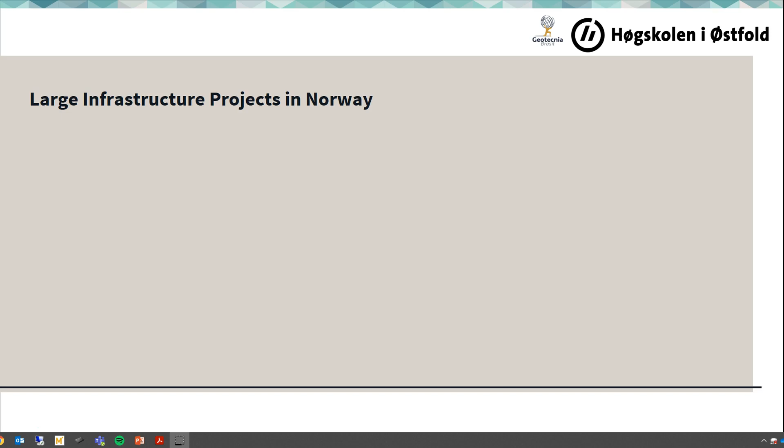Well, just to give a little introduction of what we are talking about. When we think of developed countries like Norway, we think all infrastructures are well done, very big, like those big roads with big bridges crossing fjords or mountains, or big double lines.

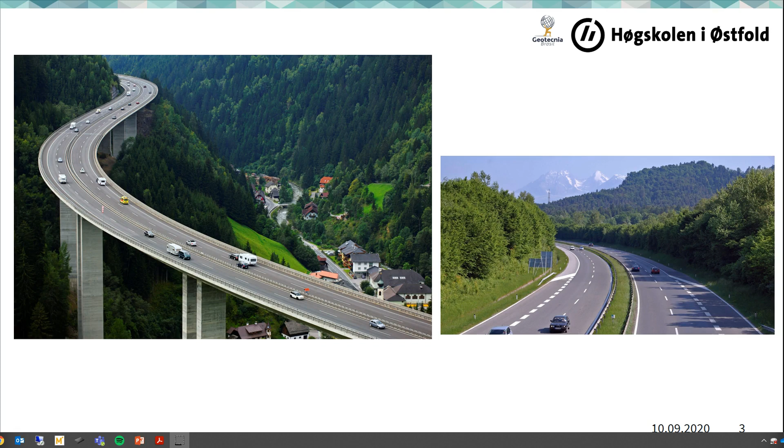Well, unfortunately, this is not the case in Norway, because in fact Norway has more or less roads like this, very narrow, crossing the mountains or crossing lakes, fjords, or even crossing mountains with snow during the winter. So that brings us a lot of problems in the traffic.

In Norway, for instance, a good example is Trollstigen, the famous mountain road in the north of Norway. It is very famous because of its deep, sinuous curves to cross the mountain. The problem is that this road is only open in the summertime. During the winter it is practically closed. So this road is very often opened in mid-May.

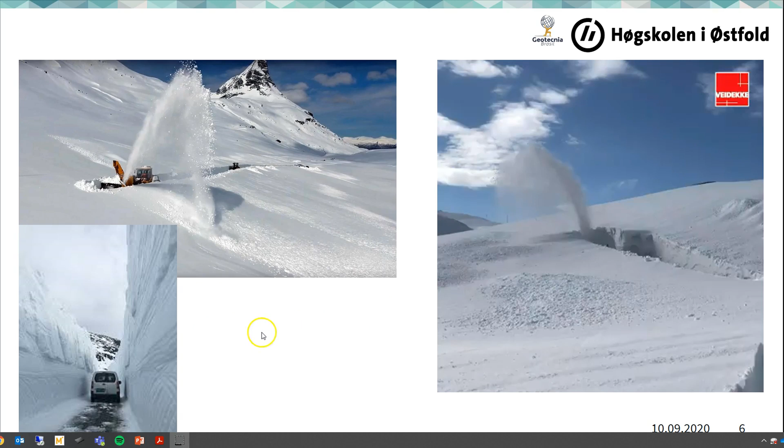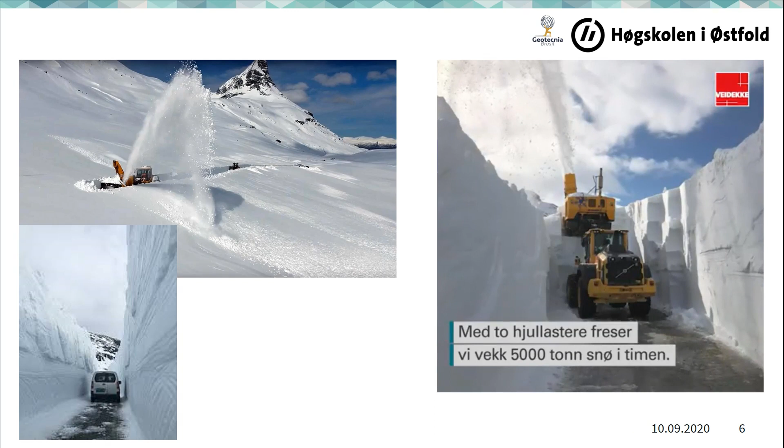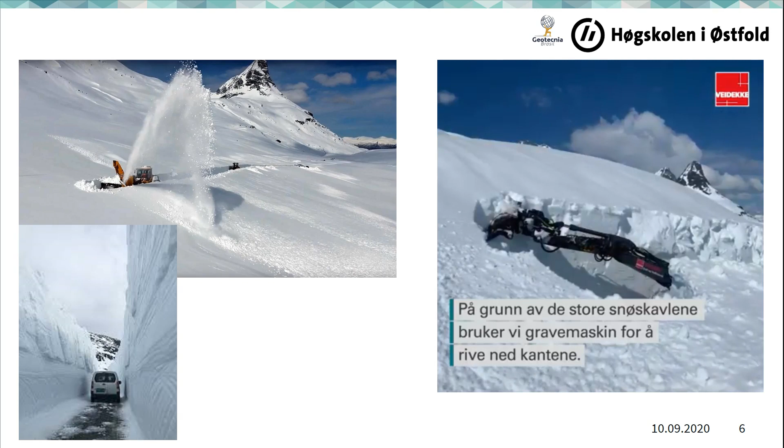So that means from almost October to May it is not possible to cross this road. So if you see here, this is the operation they did this year to open the mountain. There was a lot of snow last winter, and they had to use big machines. They took almost 5,000 tons of snow, and they dug almost 10 meters deep. So you can see that it's a very complicated process.

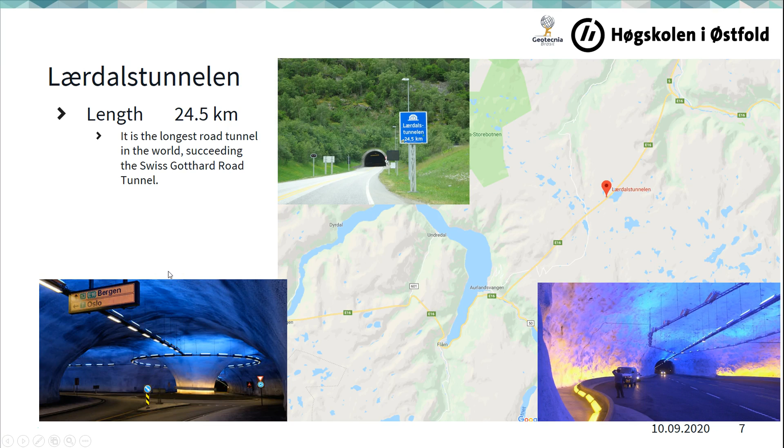We have also the very famous Atlantic Road, also in the region, Atlanterhavsveien. It is very famous because they used the natural islands in the North Sea to build the road. So the trace of the road was defined not by the engineers, but by nature and how they could connect these small islands to build the road. It's a very famous road in Norway, and you can see by the pictures it's a very nice road to cross.

Together with that, recently in southern Norway, close to Oslo, they started developing highways. So in this process, a lot of bridges and tunnels have been made. And the interesting project I want to share is the Farris Bridge, or how we call it in Norway, Farrisbrua. It crosses Farris Lake, just north of Larvik, south Norway. This bridge is part of the expansion of the E18 motorway from an antiquated single carriageway to a big highway.

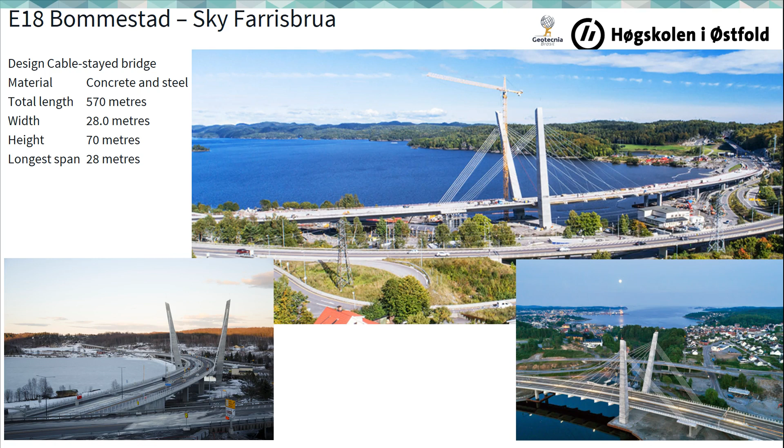So this bridge is a composite bridge because you have concrete sections with steel sections. It is 570 meters long, 70 meters high, and the maximum span is 28 meters. And on this bridge it is interesting to see the foundation process. The bridge's biggest foundation is in the tower, of course. The foundation is made of 12 pillars, steel tubes measuring approximately 2 meters in diameter. You can see it when you compare someone close to these pillars.

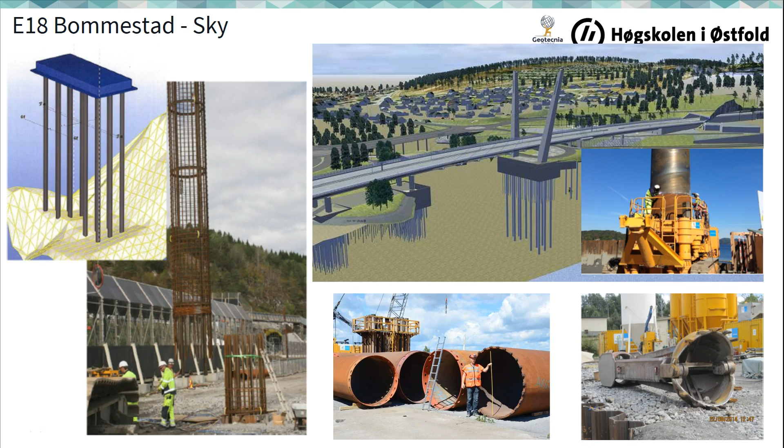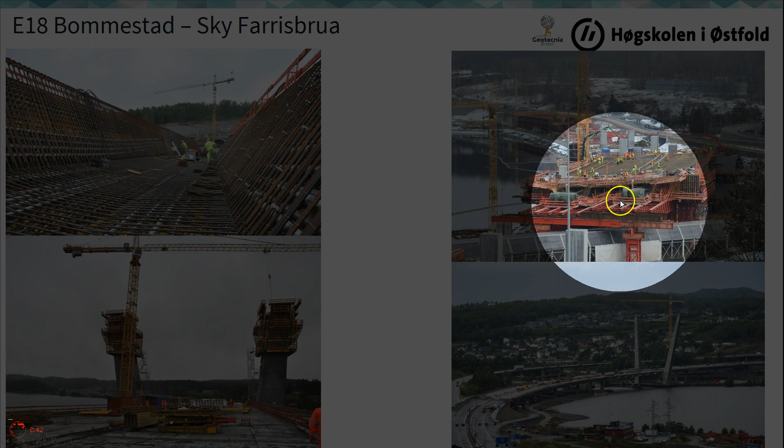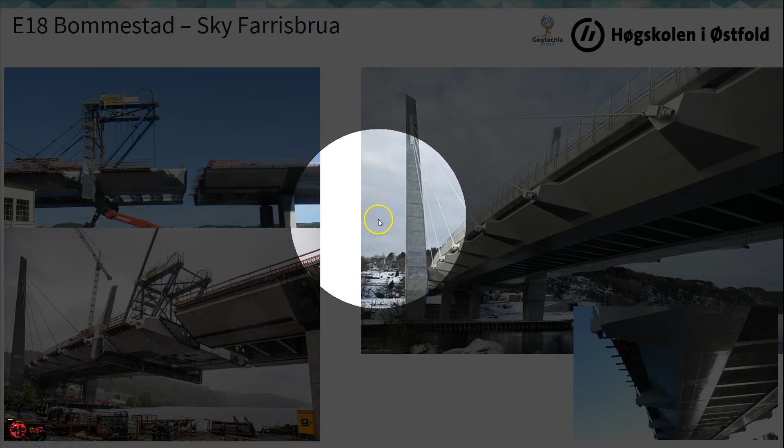As I mentioned, the main span of the bridge was steel sections, so they are assembled in pieces. They come together to connect the steel section of the bridge to the concrete sections. But what's very interesting in this project, in fact, is not the bridge itself, it is how the project was connected. Because the bridge itself is at the end of two tunnel sections, the Martineåsen tunnel and the Gopledal tunnel. So it's two tunnels connected by a bridge. And here you can see the profile of this tunnel and how deep they are made.

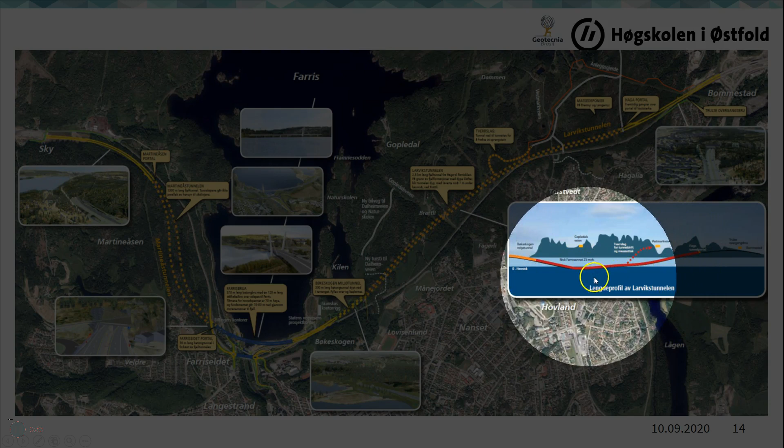Here we can see short videos where you can see the experience, what it is like to drive this tunnel. And I have to admit, it's a very good experience, especially when you go in. I will talk about those mountain rocks here after, because it's kind of interesting to discuss what happened.

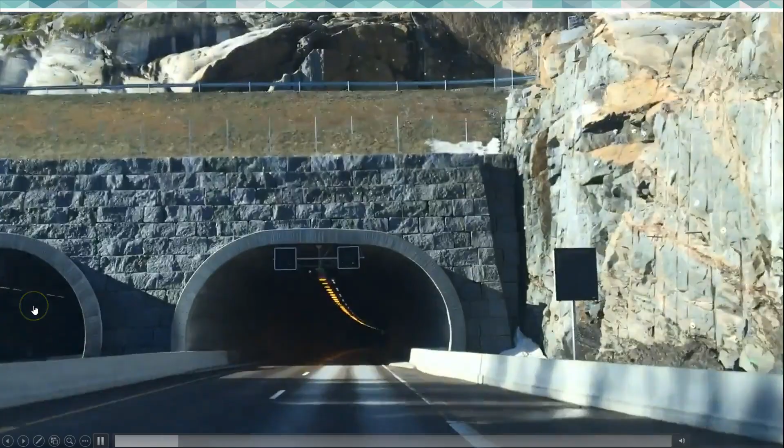So you can see this tunnel, the concrete section. The tunnel is based on concrete sections, plates. They are used to protect the structure, the concrete tunnel structure. So it's placed by sections.

The tunnel excavation was not by blasting, it was by drill excavation. Due to the characteristics of the rock, it was not appropriate to use a blasting process. So they had to drill and open the rocks. Also, the problem was the city was above the tunnel, so it was not appropriate to use a blasting process.

So you can see it is well illuminated. Also, all emergency exits are very well illuminated. It's almost one exit for each 500 meters. So it's a very safe tunnel in case of accidents.

And it's very spectacular when you finish the tunnel, then comes the bridge. It's very nice to see this effect, how you come out from a tunnel and onto a bridge. So it's a nice road trip if you think about it, and very safe.

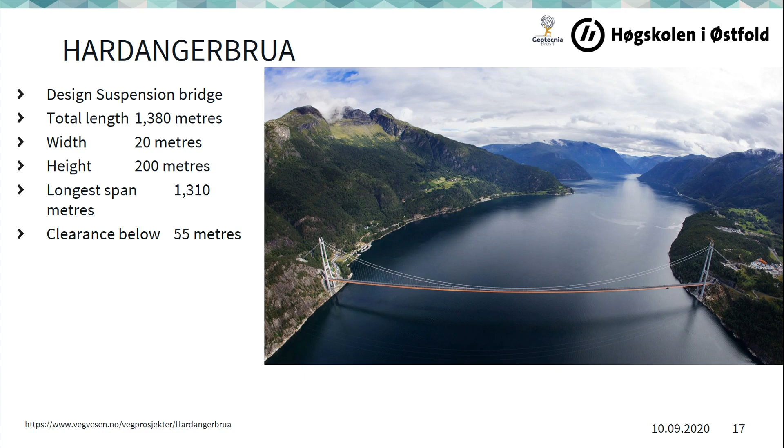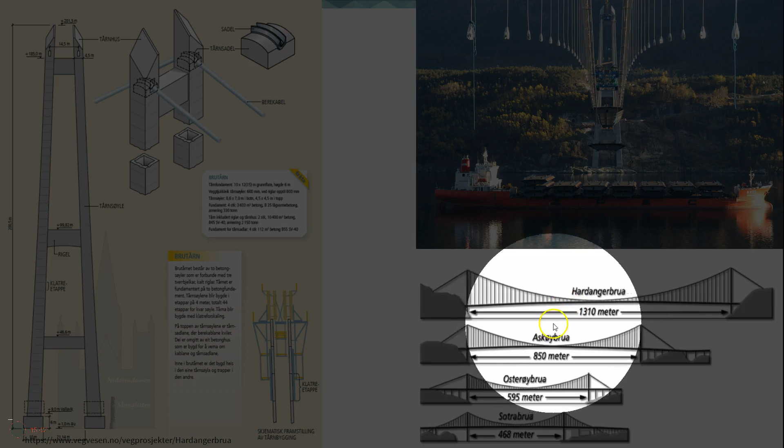This is an overview of the sections that were made. All steel sections of the bridge were transported by boat. They were built in China and sent to Norway. And this is just to have an overview of the dimension of this bridge in comparison with the other bridges in Norway.

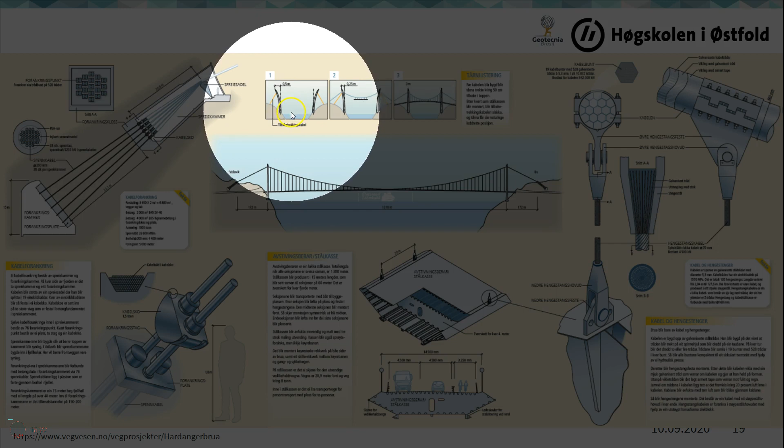And here we can see a little more detail on the section of the steel decks, how they are designed, the couplings, the cable system, and the anchorage system of the cables, and of course how the cables were designed and placed. And here is a short presentation of the construction process. First the towers were begun, then the cables were placed in the towers, and after that the deck sections of the bridge were put in place.

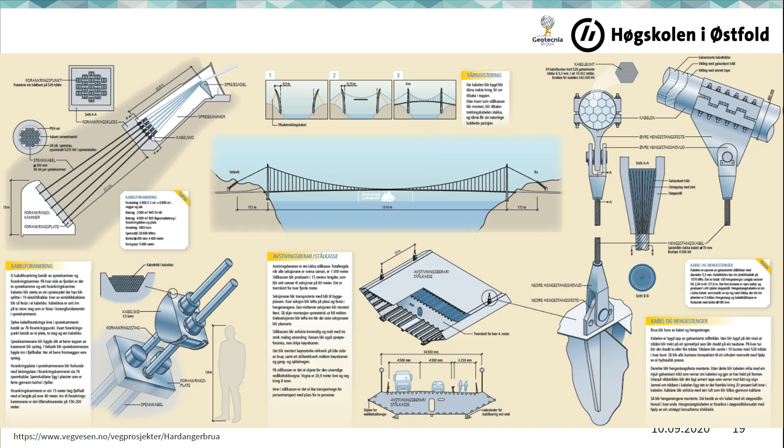But maybe the most interesting project happening now in Norway is the ferry-free E39. It's maybe the biggest infrastructure project in the world at the moment. It's very interesting because it has a lot of engineering challenges. The ferry-free E39, as we call it in Norway, is the main project to improve a stretch of the existing E39 highway between the cities of Kristiansand and Trondheim. It's almost 1,100 kilometers long.

The problem of this road is that today there are a lot of parts where you have to use a ferry to cross the fjords, as shown here in red. There are almost 7 ferry crossings. So the main idea of this project is to replace some of these fjord crossings with alternative routes like tunnels or bridges to reduce travel time along the west coast of Norway.

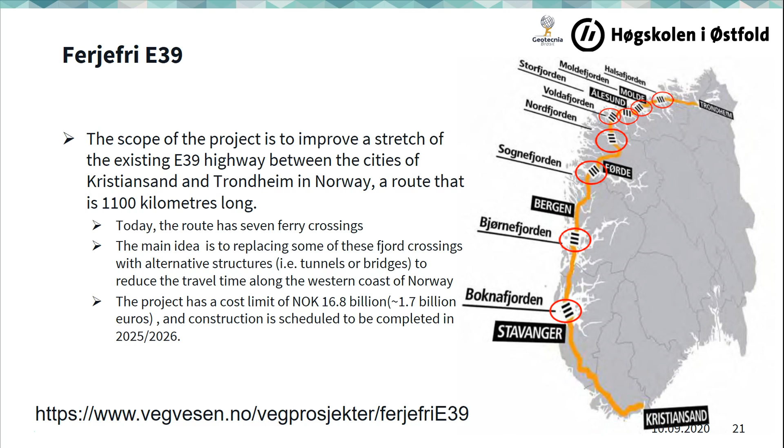The project has a cost limit of 16.8 billion Norwegian crowns, approximately 1.7 billion euros. Construction was planned to complete in 2026, but the latest planning is to complete in 2030, later on 2031. Just to give a perspective of what we are talking about, if we take a drive from Stavanger to Bergen, it is just 210 kilometers.

But due to the ferry crossing time, you can have almost a 5 hour trip. That's very long. The other option is using the mountains, which can be even longer in time. It's not so long in distance, but the time can be very long, 6 hours long.

And we are talking about this in a good summer day. In a typical Norwegian winter time, we talk about almost 3 or 4 hours more. And here are some ferries that you have to cross.

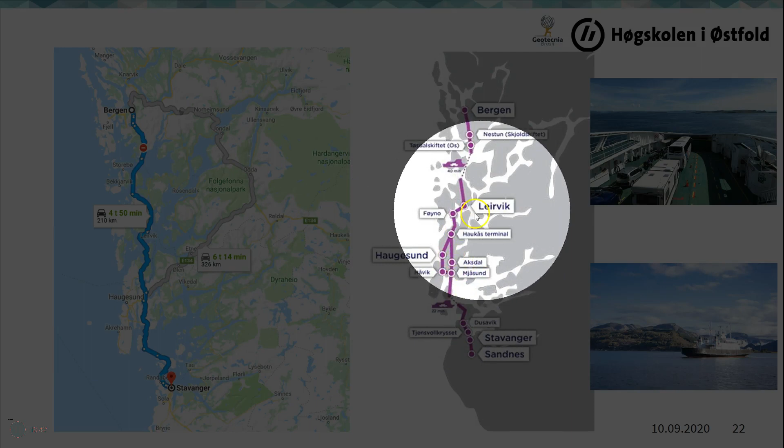Some people can say using the crossing ferries is not a problem because you can have some relaxed time, drink a coffee, also use this time to see the views of the fjord. Of course that is a good option, but not normal. You can have very nice weather, but sometimes you can have problems.

You have some storms crossing the fjords and that can sometimes be very problematic. In recent years there have been a lot of storms in Norway, and during the crossing ferries we had a lot of accidents. This was during a crossing in a storm.

A truck inside the ferry just rolled over and crushed some cars. This is another example: a concrete truck that rolled over inside a fjord, and this was inside the deck of another ferry. Some have had problems during the storms.

So although it's not very often, it can be very problematic sometimes. So we have to consider that the government has to decide what kind of bridge they can use in the process. Here is just a short review of what kind of bridges we can use.

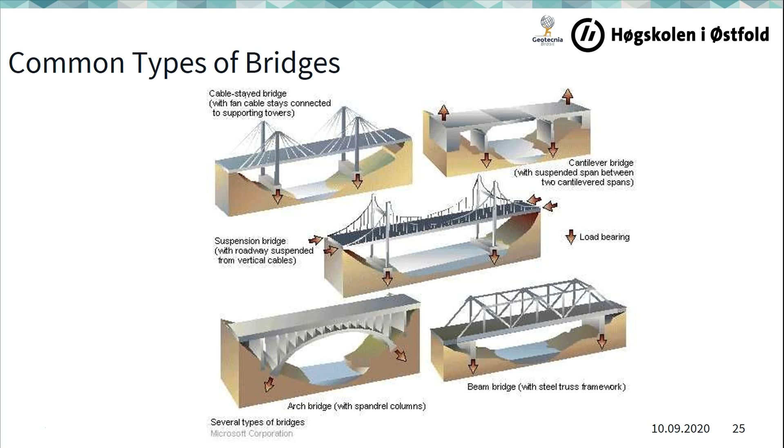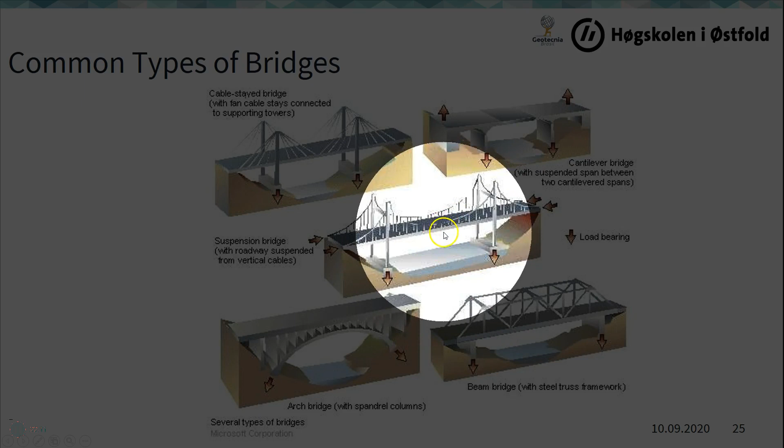The problem was each bridge has its own limitation regarding the span. For example, a cantilever bridge is very limited. The maximum span some can hold is an arch bridge or cable-stayed bridge. The most appropriate to cross fjords sometimes is a suspension bridge because it gives you more span length. Also, you can have more free span between the bridge and the water.

So the government tried to understand the experience from other projects. For example, the Akashi Kaikyo bridge had almost 2,000 meters free span. That still holds the record of the longest free span bridge. There was the project of Messina Bridge, with 3,300 meters free span, that was in conception but was not built yet.

And there is another experience in the region itself with a floating bridge process that's still state of the art, and there is so far no submerged floating tunnel experience, although there is a lot of experience from another type of submerged tunnels.

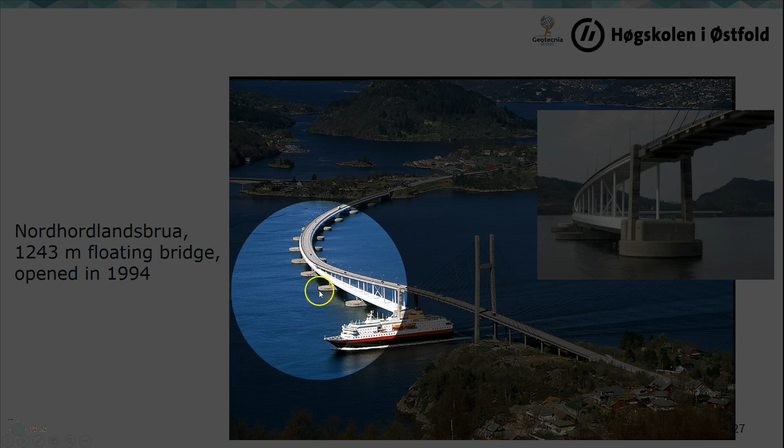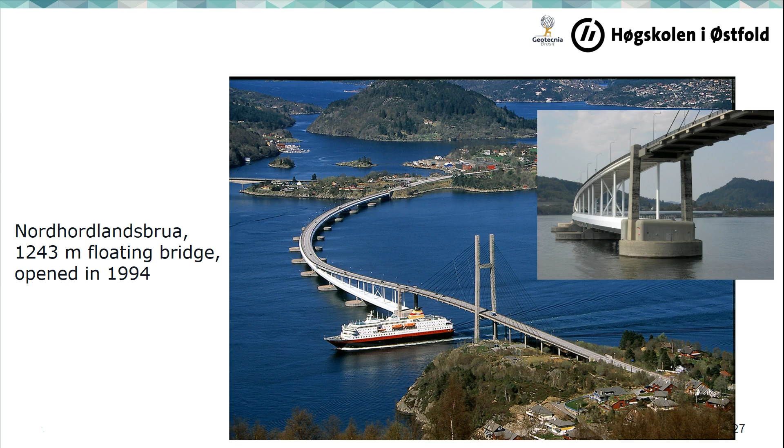From the point of view of Norwegian experience, there is this Nordhordlandsbrua bridge, which was a 1,240 meter floating bridge. So instead of having a normal column deep in the water, you have these pontoon elements, so they are floating and fixed in the bottom of the fjord. This was the main option that the government has considered for crossing the fjords.

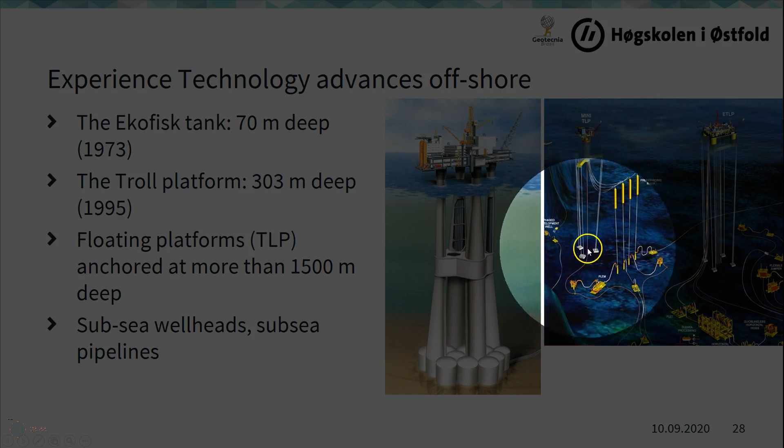Of course, they have the experience technology from offshore industries. For example, Norway has good experience with deep elements from the Troll platform that is 303 meters deep, the biggest concrete element ever made. So they also have experience with floating platforms where the structure is floating but anchored in the seabed by cables, and they have a lot of experience in subsea pipeline systems.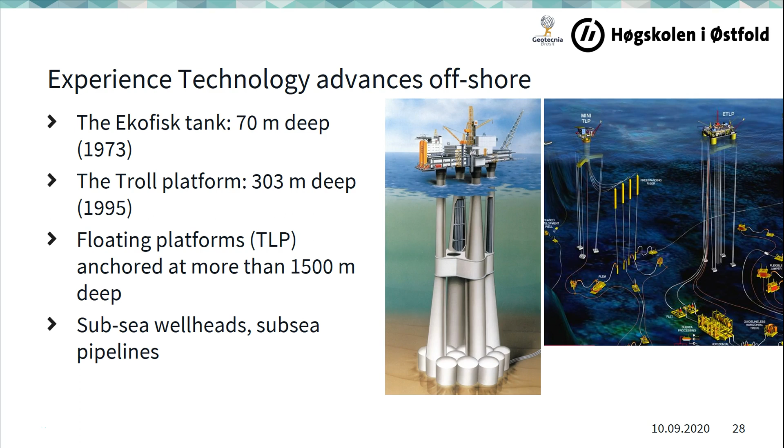So the main idea is to use this experience from offshore in these projects. Just to give a short overview of the options, for example we have some fjords. Halsafjorden is 2,000 meters crossing and 200 meters deep.

It will be a project combining a bridge style with tunnel. We have Moldefjorden, which is 1,600 meters with a bridge combination with 13 kilometers of subsea rock. There is Storfjorden, approximately 3,100 to 3,400 meters crossing and 450 meters deep. And there's Voldafjorden in Norway. So these are the projects currently in development.

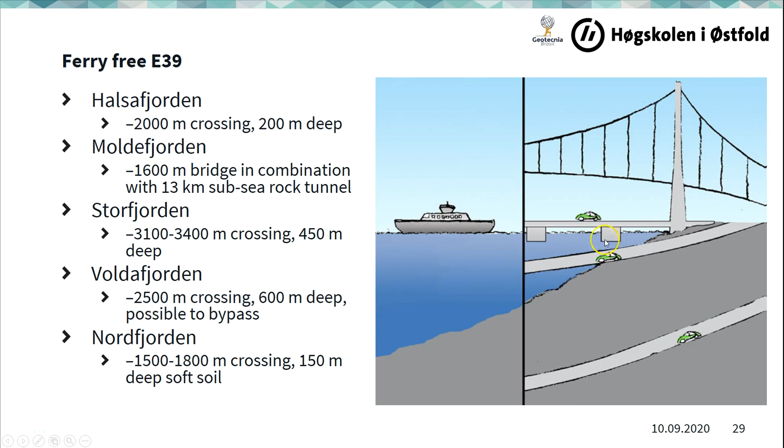So most of them were designed with a combination of the suspension bridge and tunnels or floating system. This is an example, Moldefjord: a combination of tunnel with a suspension bridge. This project is under development and will probably start later this year or at the beginning of next year.

But this is not the most challenging fjord crossing that we have in this project. Maybe the most challenging are these three. The Sognefjorden, that is 3,700 meters crossing, and we have a depth of 1,300 meters. We have Bjørnefjorden, that is almost 5 kilometers crossing, 500 meters deep.

And it's possibly to bypass with 1.3 kilometers. And you have Boknafjorden, which was almost decided, is 25 kilometers of subsea rock tunnel based on 360 meters deep.

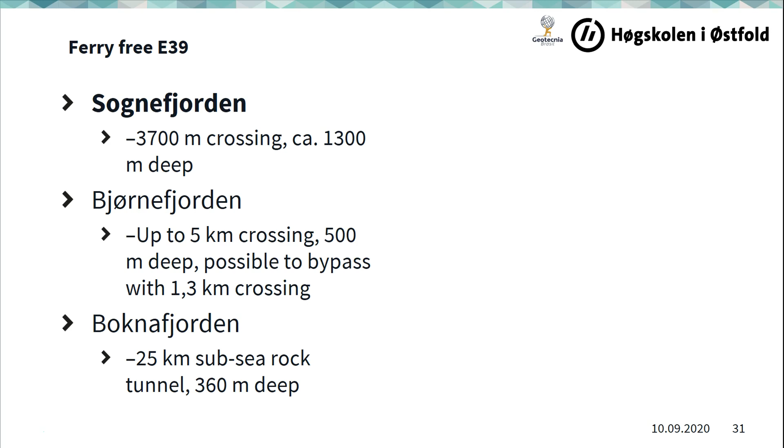So let's talk about the Sognefjorden, maybe the most challenging fjord to cross in this project. The options that were available were considering a cable stay bridge, floating bridge, and submerged floating tunnel. The subsea rock tunnel was not considered in this case because it's not viable or could be very expensive.

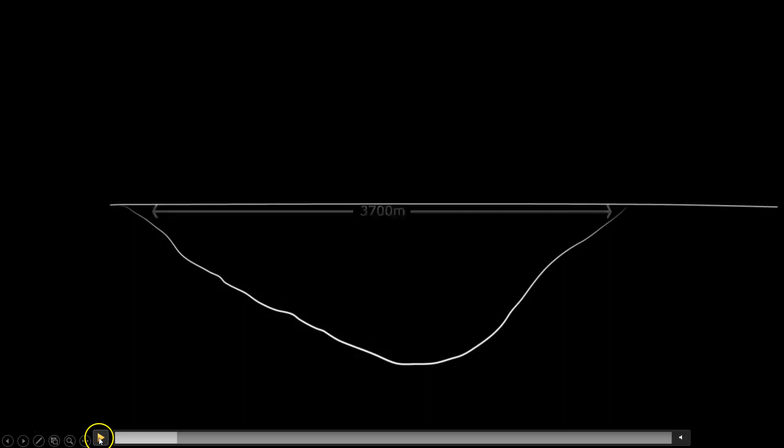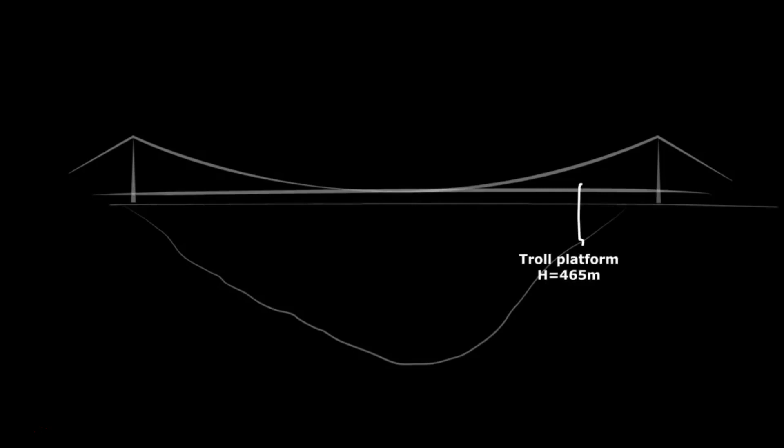So this is just an overview of what we are talking about. We are talking about 3,700 meters length, and about 1,300 meters deep. So if we have a suspension bridge crossing, this should cross this. Just to give a perspective, the Troll platform is 465 meters. So this is a challenge that requires crossing this fjord.

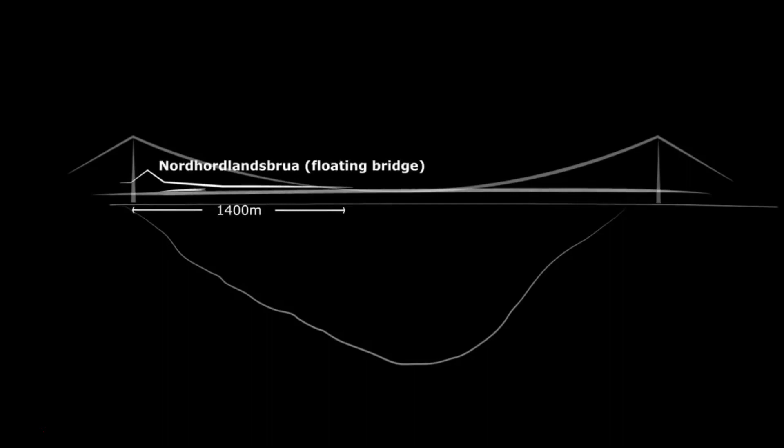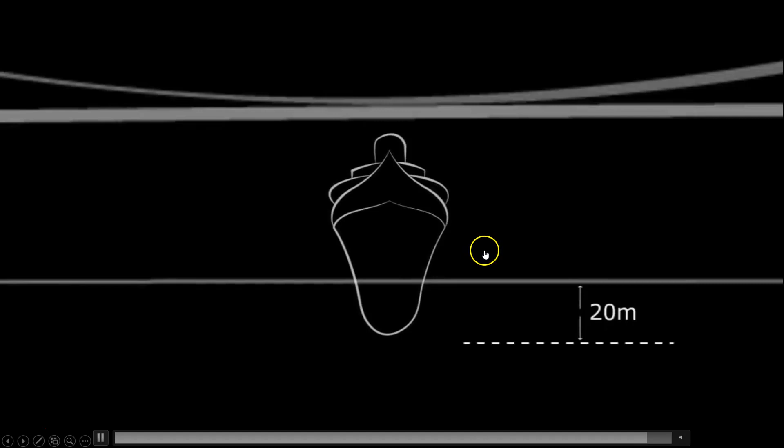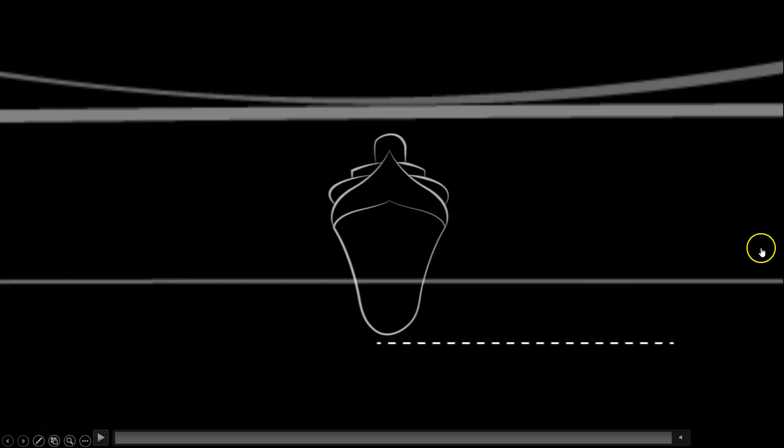Just another comparison, we can see the Nordhordlandsbrua at 1,400 meters, or compare with Akashi-Kaikyo Bridge, to see how the project looks like. Our project also needs to have clearance for ships, especially cruise ships crossing this fjord, because this is the main route to the most famous fjord in Norway, Geiranger. Just to have a perspective, if I put the Akashi-Kaikyo Bridge in the same project, you can see it could be very big, maybe the biggest suspension bridge in the world.

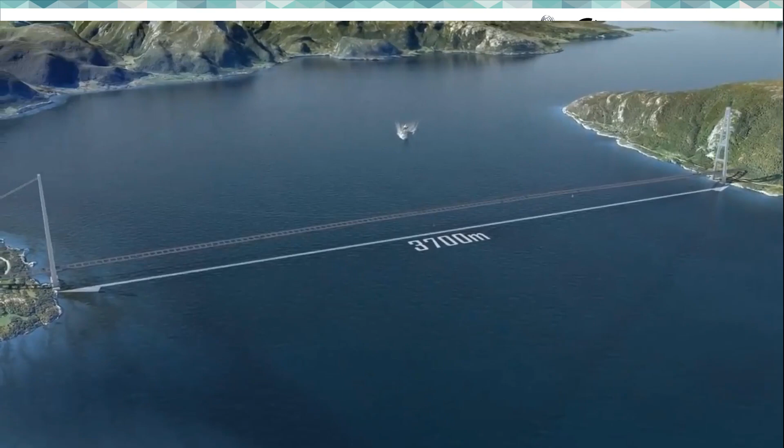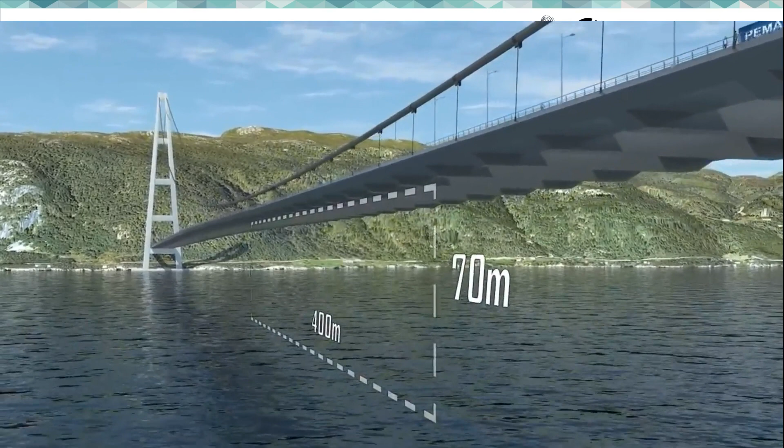So if the suspension bridge process could be this, we talk about crossing 3,700 meters with two main lines connected by small deck elements to connect the roads. This is a challenge, not just the bridge, but for example the towers to hold the cables should be almost 500 meters higher. So this is still one option for this bridge. The government has not already decided which option it's going to be.

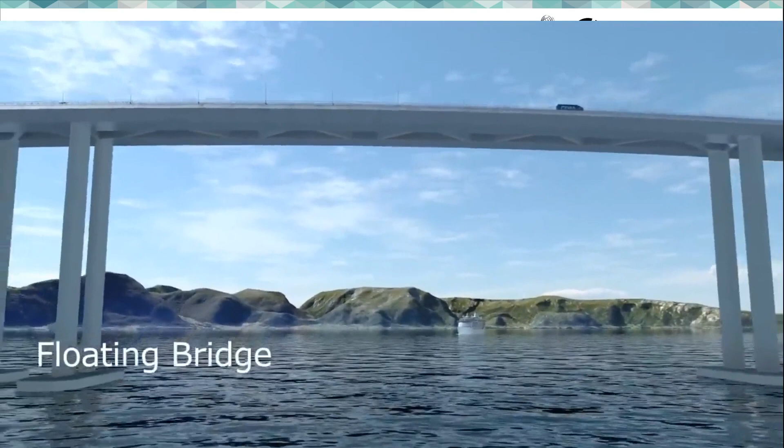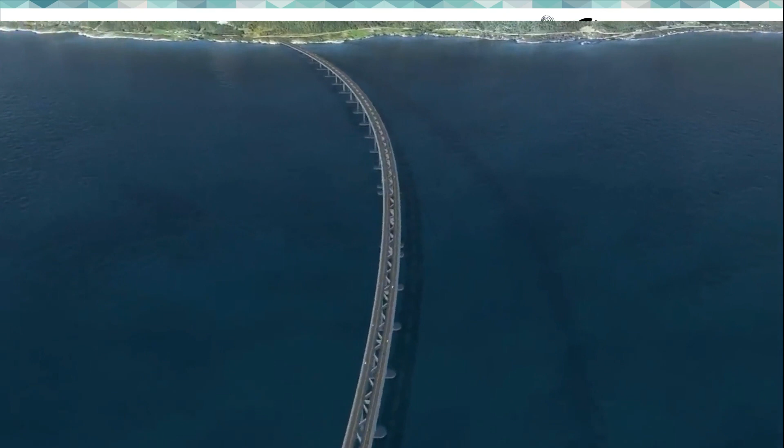The other option could be a floating bridge system, where you have a floating system to support the bridge. That could be another option. But as I say, this is maybe the most challenging crossing in the world. The government still hasn't decided what they're going for. This is just a simulation of how the deck of the bridge could be. In fact, it should be two bridges connected in the middle by some beam system.

Here is another option, the submerged tunnel. Submerged tunnels would be a tunnel that is floating, anchored by a floating system and anchored in the middle to the bedrock. That could be an option also. From the point of view of the engineer, this would be the most challenging and interesting bridge ever made. There are a lot of people eager to see this being made, and there was a lot of discussion about this process.

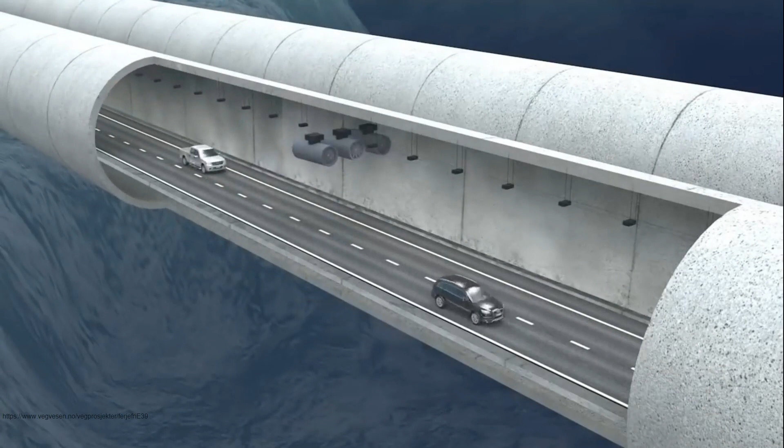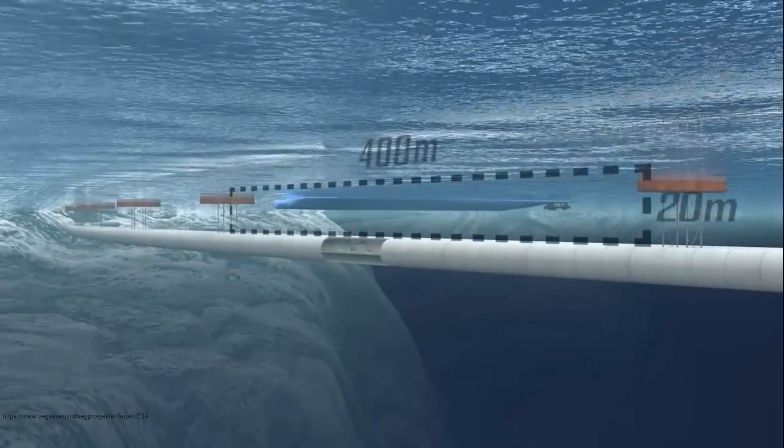There was supposed to be two sections of prefabricated concrete tunnels, connecting each one, and to begin with have two lines of traffic, and each element could be anchored by a floating system and would give passage to ships. Of course, this is a project not decided yet, so this is just an overview of the design process. There was a lot of discussion in the government. The problem was the authorities were not convinced to use this process because it had never been made before, and when it comes to costs, what is new is very difficult to quantify in terms of final cost.

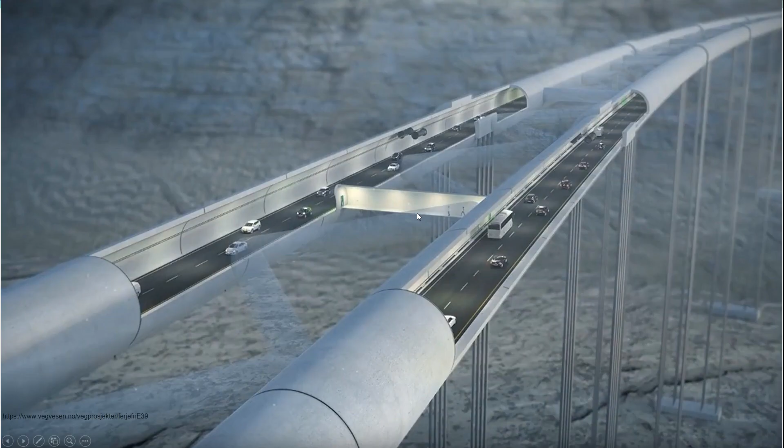Another section showing how these tunnels will be, how they are anchored in the seabed, and how they stay together, and of course the safety system and safe passage system.

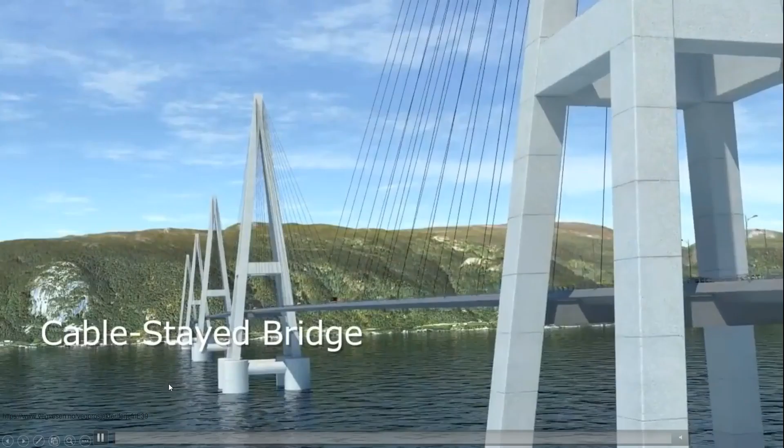And of course there was another option, the cable stayed bridge, but using floating columns that were fixed to the seabed. Nowadays this was considered the more feasible option because there is a lot of experience from offshore structures on how to build floating elements. So that was considered maybe the most appropriate solution for this bridge. But as I say, there is no green light from the government yet, they have not decided which project they will go for.

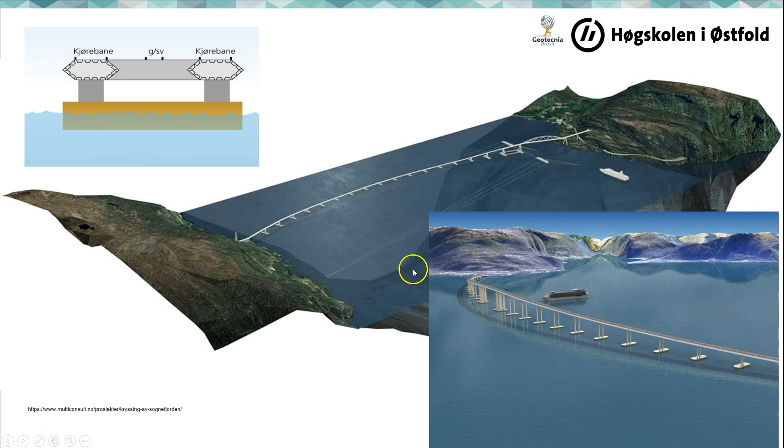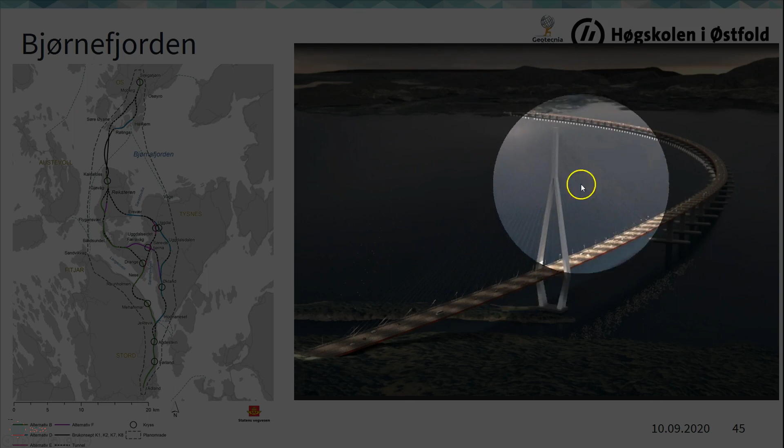Another example of the floating bridge sections that could be used. There is another fjord that was kind of challenging, Bjørnefjorden. It could be very challenging also, but it was decided the winner project would be this combination of suspension bridge, stay bridge, with floating bridge. That was decided by the government, and the fact is they want to use this Bjørnefjorden crossing as a test to see if they can go to the same solution for Sognefjorden.

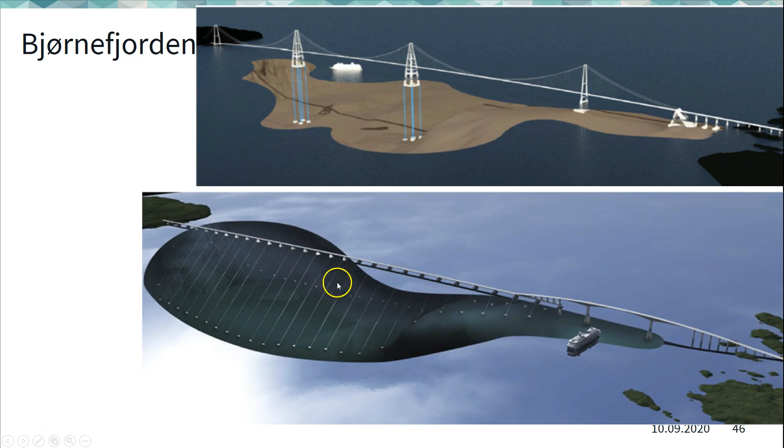The other options considered for the same fjord were floating bridge elements, and of course the winner was the floating sections elements. They also considered a submerged tunnel, and there were a lot of engineers eager to use this solution just to have it as a test for Sognefjorden, but the winner was the floating system columns.

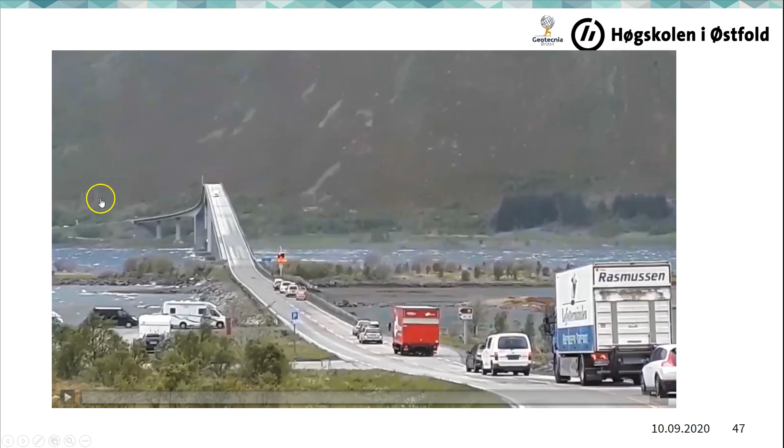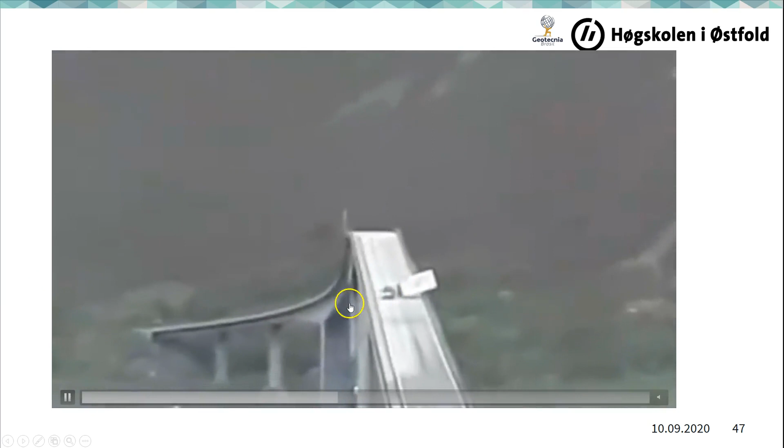Well, of course, we have to consider that crossing bridges sometimes can give you problems, especially when you are near the coast. This is a good example of something that could happen when you are crossing a bridge during a storm. You have to stop the bridge because sometimes the winds can be very strong, so they have to stop. That was an example when they tried to cross during a windstorm. So that's how they decided to do that, they decided to use another solution, tunnels.

Right now the two big projects being developed are the Rogfast and Ryfast tunnels. The Rogfast tunnel was supposed to be finished in 2022, but because of costs, this process is delayed to 2029. The Ryfast was planning to finish in 2019, and it was finished and opened in January 2020.

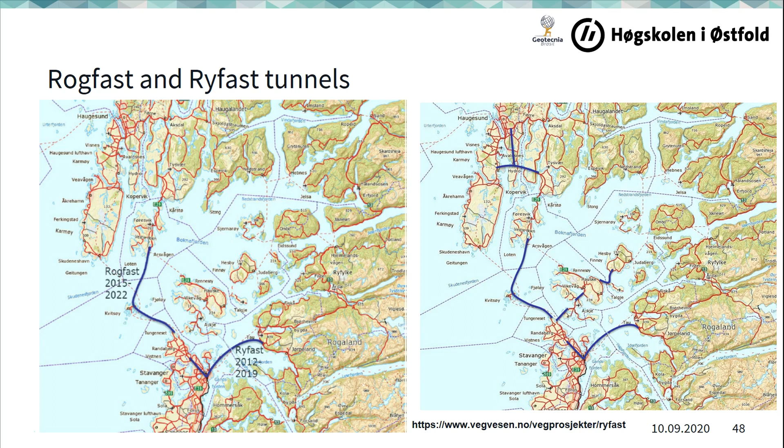Of course, these projects are just a step forward to have more tunnels connected in the area of Stavanger. These projects should be part of a series of new tunnels that have to be built in this area.

Let's talk about the Ryfast tunnel, or tunnelen in Norwegian. This tunnel has won the title of the world's longest subsea road tunnel, at almost 15 kilometers long, with the deepest point at minus 290 meters below sea level.

It has two lanes, two tubes. The approximate traffic was 8,000 cars a day projected for 2035, but nowadays it's almost 4,000 cars a day.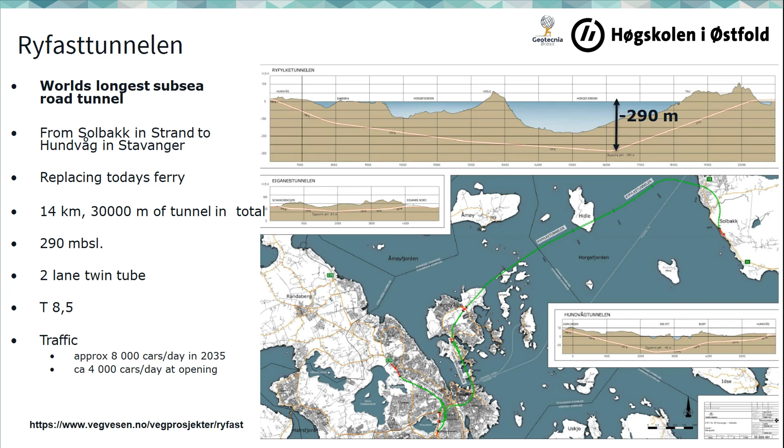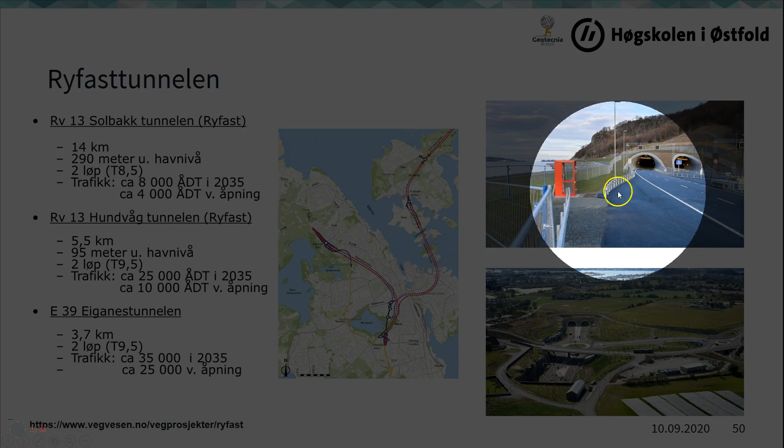So this tunnel was opened recently, and this is just an overview of the main entries — one side is the main entry on the Stavanger side. This is just to see the process.

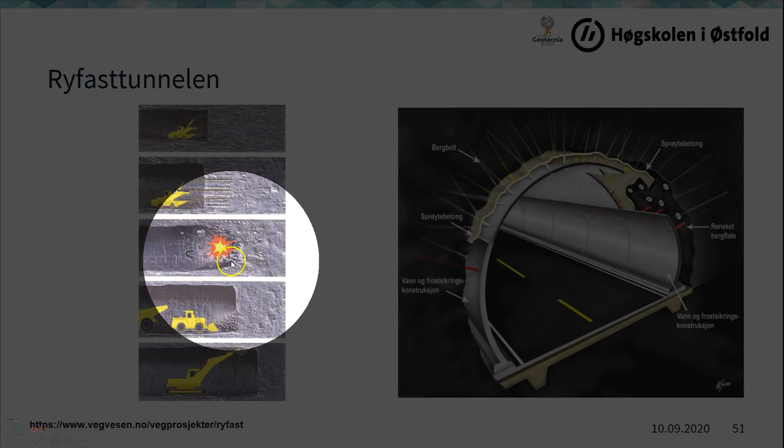The tunnel was constructed with an explosion process. When they drill the rock, first they make sure there is no water in the process. If there was water, they would seal it, and then it was drilled to place the explosives and detonate, then proceed with excavation. The sections were anchored in the rock, and the concrete sections used as tunnel lining were anchored in the rock. So this is just the process they used.

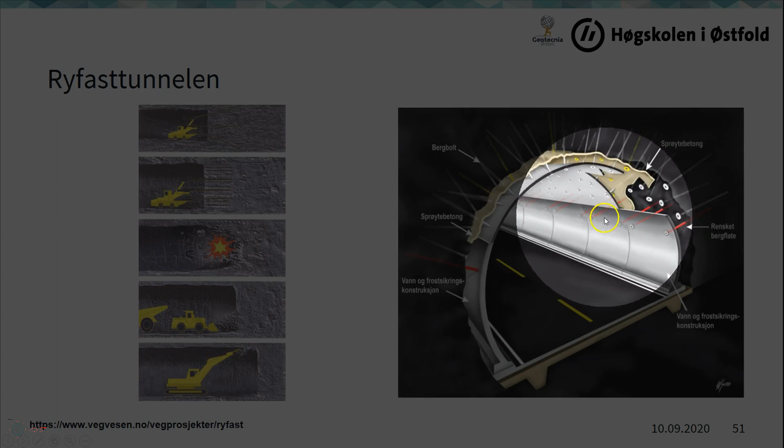This is another overview of the process. You can see here the anchors that were put in place in the rock. And here is another view of the tunnel after it was finished.

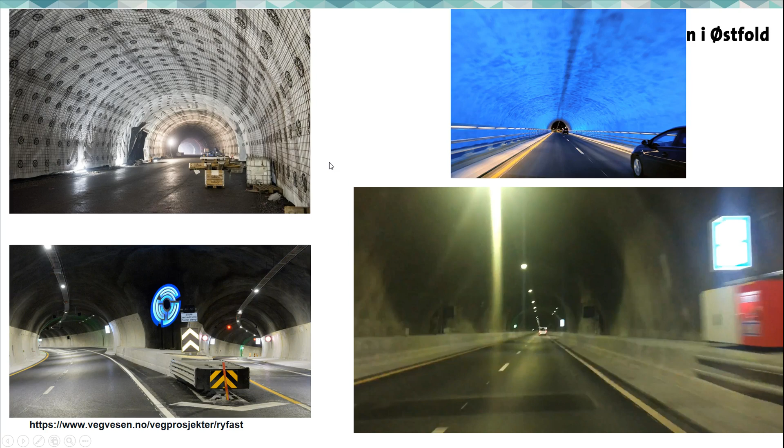This is the most interesting part, celebrating the deepest tunnel in the world. They made this section, and this is my personal experience — it's very interesting when you drive this tunnel and come to this section that is completely blue. It's a very pleasant experience to drive. It's very spectacular when you know you are in the deepest section of the road. That's a very good experience, and I have to admit, you feel very safe in this tunnel.

But the Ryfast tunnel still holds the title of the longest — if the Rogfast tunnel, crossing the Boknafjorden, believe is finished, then we lose the title, because Rogfast is supposed to be the world record subsea tunnel, expected to be 27 kilometers long and 392 meters deep below sea level.

This tunnel started the process this year. It was supposed to start two years ago, but as I said, because of costs and some design aspects of the project, they have had some delays.

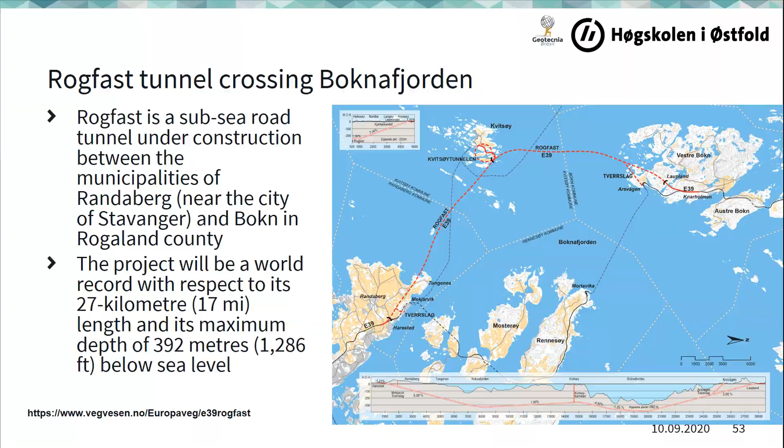These are the sections that will be 4 lanes, meaning there will be 2 tunnels at the same time, separated from the middle — so 2 independent tunnels. The section will be excavated on the bedrock. That was the main reason for the delay of the project, because they have to have a complete mapping of the rock.

This section will not be different from other tunnels built in Norway — it will have almost the same characteristics as the Ryfast tunnel. The only difference is the length, as I said, 27 kilometers, and almost 400 meters below sea level.

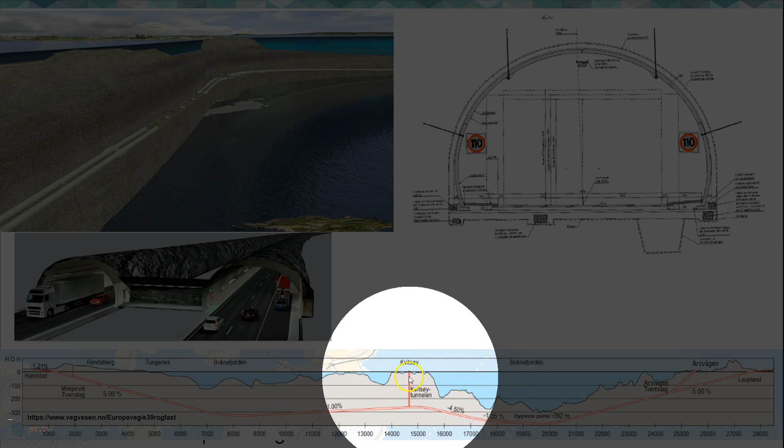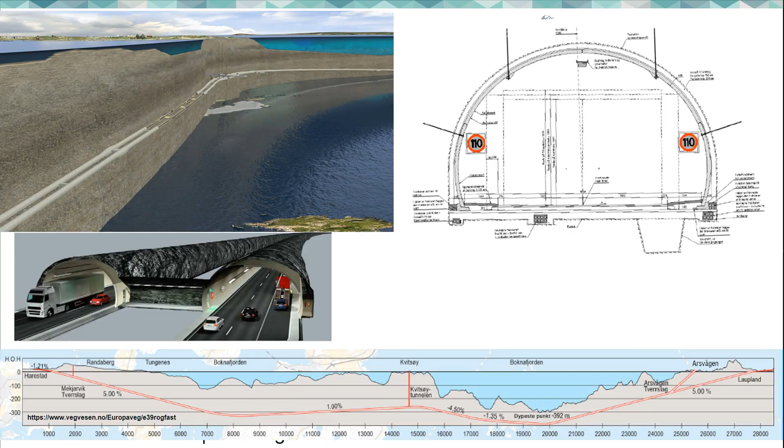But besides that, we have to consider another thing — we have this island, Kvitsøy. So the government has decided that this island should also be connected to the tunnel. That means besides being very deep, you're going to have the biggest roundabout in the world, we can say, to connect this island with the tunnel.

This is the process they have planned, and they've already started now. So you're going to have a large roundabout inside the tunnel that allows you to connect with this island.

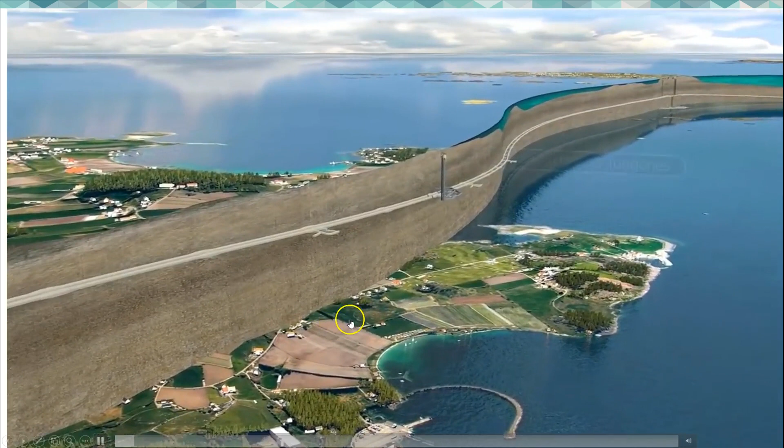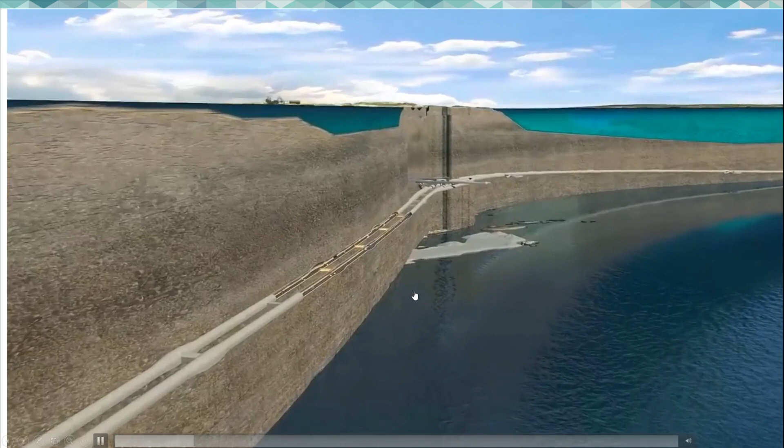This is a section overview of how they're planning it to be. You can see it's planned to have a lot of ventilation shafts, and the tunnel goes very deep in the rock, with escape exits every 500 meters, and an intersection with Kvitsøy.

So this is how it will be if you drive this tunnel. This is expected to already be starting the process.

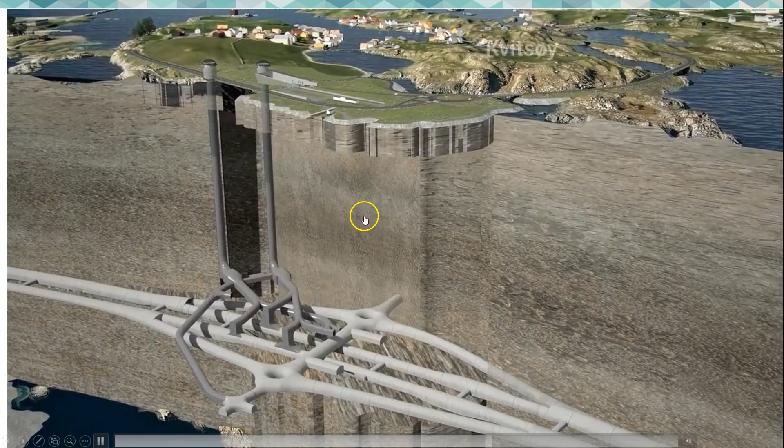I hope this will soon be finished. I hope to have the experience of driving this tunnel and share it with you again. So this is just an overview of how the project will be handled.

So that was my intention, to give a good overview of what Norway is doing in terms of infrastructure. All information was based on the Statens vegvesen website, where this project is hosted, and more information can be found on the website.